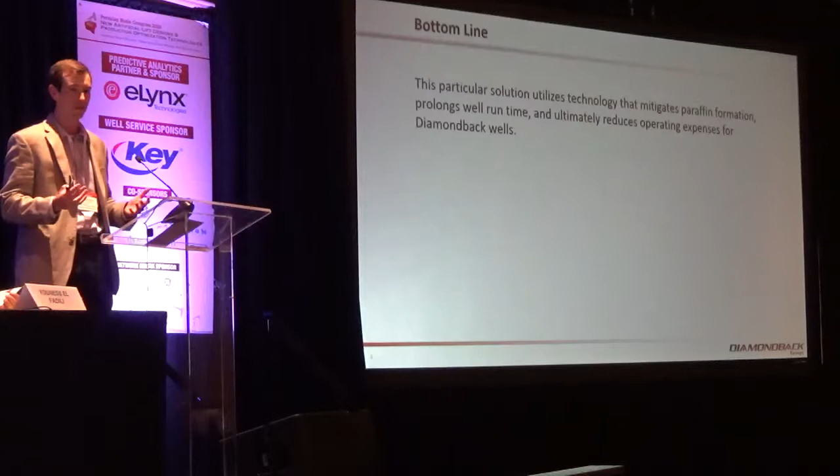So to help keep the attention, I'm going to attack the bottom line first. We were able to find a solution that mitigates paraffin formation, extends run life between wells, reduces failure time, and ultimately reduces operating expenses for Diamondback wells.

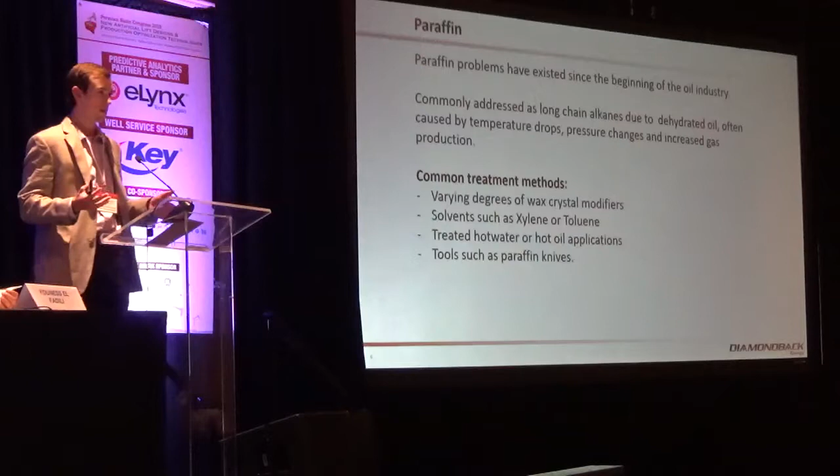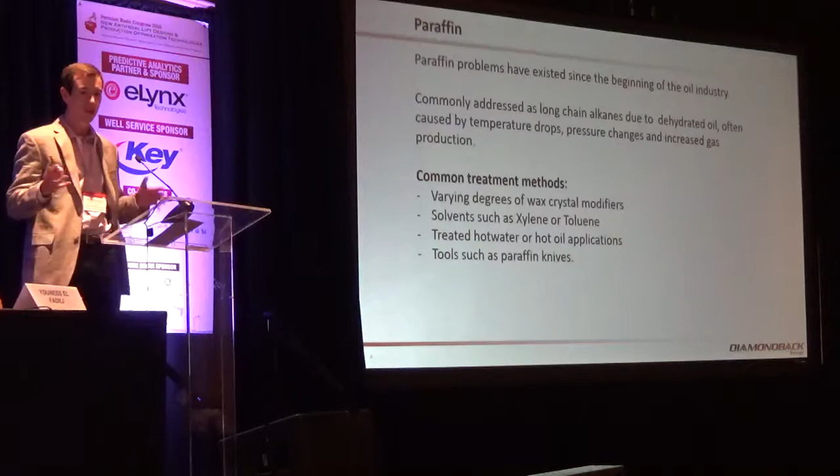So diving into paraffin, if you don't have to deal with paraffin in your oil wells, you're blessed. For the rest of us, paraffin has been around since the beginning of the oil industry. Back in the first oil well in the 1800s, they were dealing with this stuff. It's commonly addressed as long chain alkanes due to dehydrated oil. It's often caused by temperature drops, pressure differentials, increased gas production.

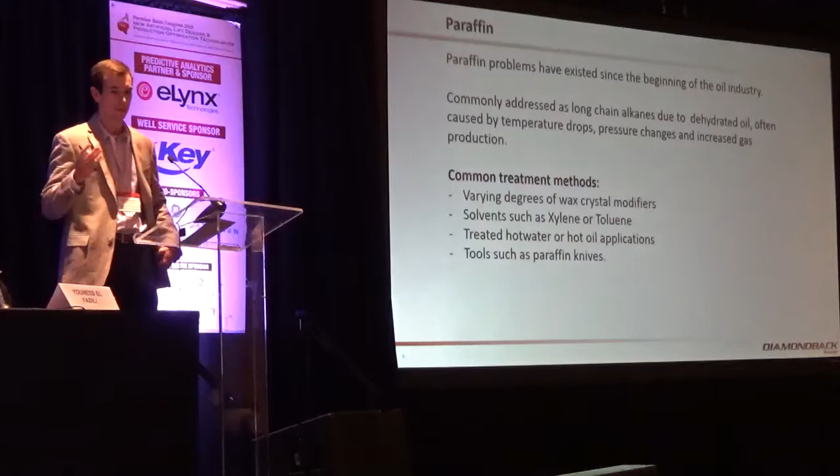Common treatment methods in the Permian, everybody uses wax crystal modifiers at some concentration. We heard yesterday some of these companies are using various degrees of xylene and toluene, whether that's treatments on a frequent basis or in workovers, hot oil applications, hot water, and then when you get a workover rig there, paraffin knives at times, at severe times.

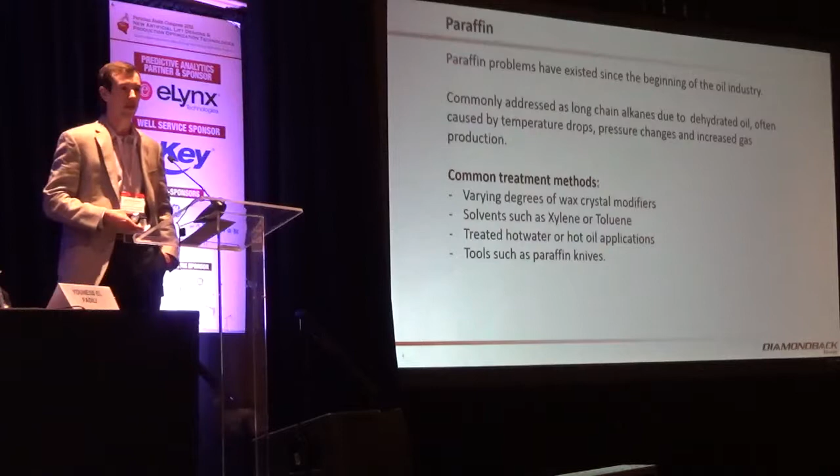The field that was in focus for Diamondback is called the Bloxham Prospect. It's a field that's about 45 minutes south of Midland. It's considered the South Midland Basin.

This field is kind of the worst among paraffin issues for Diamondback's portfolio. This area was initially part of the multi-stacked vertical play called the Wolfberry about 10 years or so ago. Then as horizontal technology swept through, we started drilling Wolfcamp shale wells and Sprayberry shale wells also. So we've got a mixture of both vertical wells and horizontal wells.

At this point in the life cycle, all the wells are in their exponential decline. A lot of the wells were initially drilled in the 2009, 2010 era.

For this particular field, any well work we do is always met by dealing with paraffin. The cloud points range from surface, sometimes we see paraffin on the surface pipe, all the way down to about 3,000, give or take. When we have a rig doing work, we are on average 1 to 2 days just focusing on paraffin before we get to the actual failure, whether it's the rod part, hole in tubing, or what have you. Worst case scenarios were 5 to 7 days - hot watering, rod stripping, you name it - trying to take care of the paraffin to clear everything out.

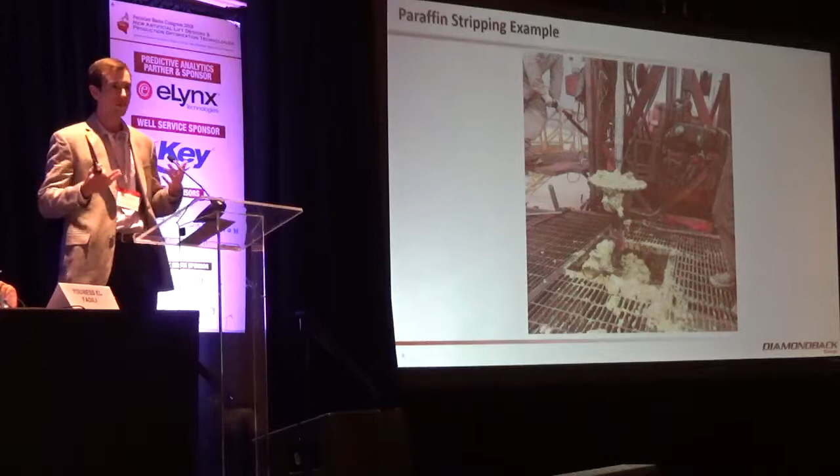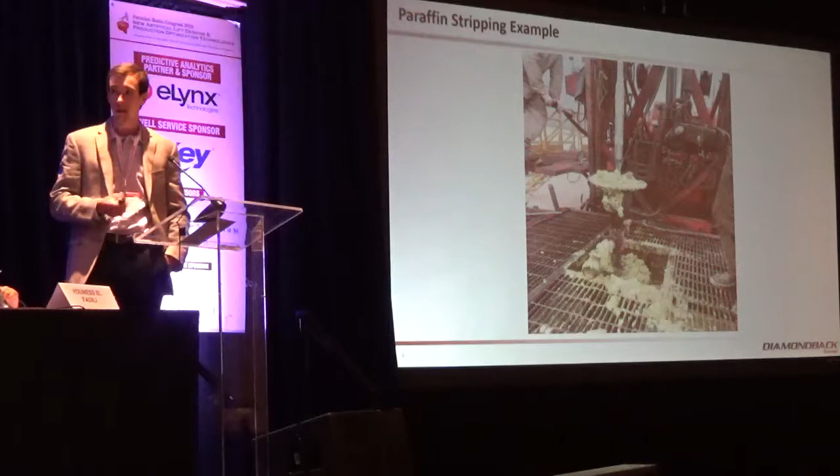So I learn best with pictures, and that's what I have a lot of in my presentation today. Here's a common photo that we see stripping out of the tubing there. We've got dehydrated paraffin just falling off the rod string there.

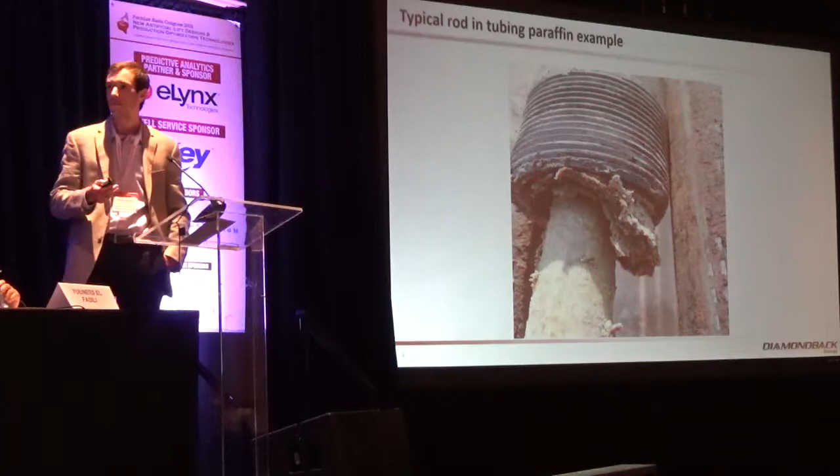Another example of stripping rods out. Beautiful. This is my favorite. Just like the issue I described before, where we're unsetting the TAC and coming out tubing joint by tubing joint, there's a rod in there somewhere.

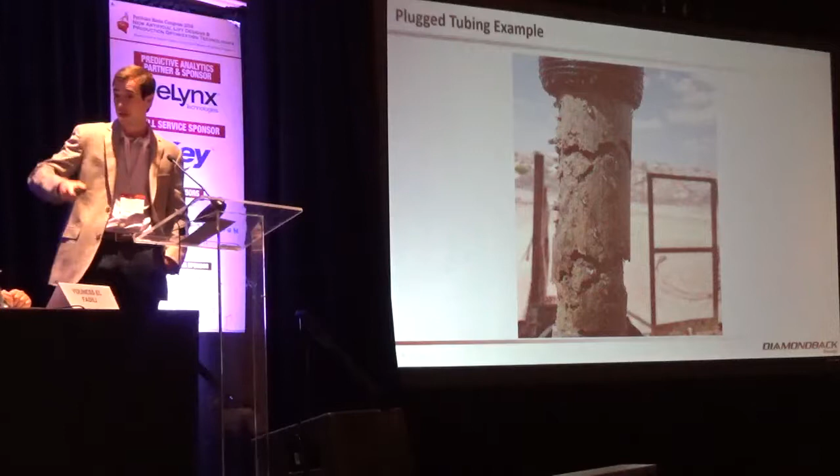We've got the pin end of the tubing above, and then we've got the box end of the next joint. This is on the rig floor, and the paraffin's just occupying every void space in that tubing. The interesting thing about all these wells is these are all batch treated wells, so there's wax crystal modifier pumping down the backside at some frequency. It's obviously not doing its job.

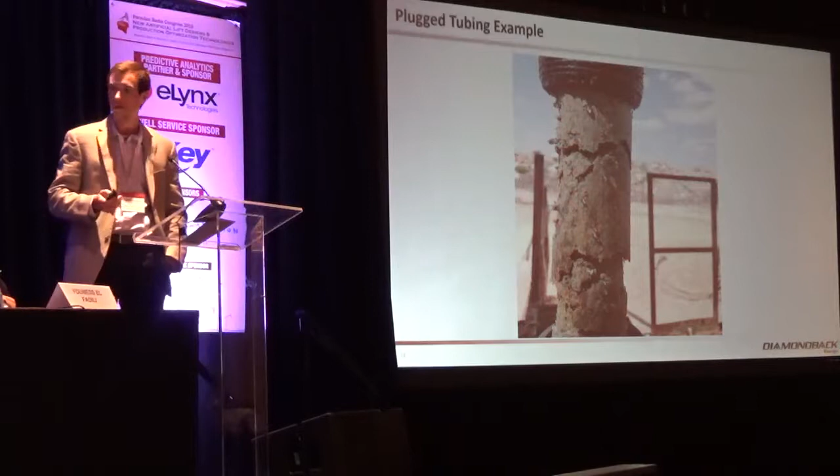So initiating what would become our version 1.0 test, we set up parameters for this first part of the study. As a team, we went out and issued opportunities for 3 other unconventional style companies, along with the existing chemical company we had. We had guys offering the nanoparticle blend. We had some guys offering this aromatic, aliphatic type chemical. So we had 4 companies in total.

Just a couple of points about the first test. It was to be a 3-month test period with a well pull at the end, just to verify what we had through physical examination.

What was special about this too is that we went to the chemical companies and said, hey, you guys tell us what to pump, you tell us the frequency, the methodology for treatment, and we're going to yield to you for the success of your particular well.

We also utilized - we had our pumpers checking back pressure valves, check valves, getting a surface analysis of paraffin on the top. And we also utilized flow line recording devices, checking the trends for flow rate and pressure changes throughout the time frame.

And so after the 3-month period, we went to move a rig over there and started pulling rods. We pulled all the wells unannounced, just to keep everybody on the same playing field. Sometimes you got to do that.

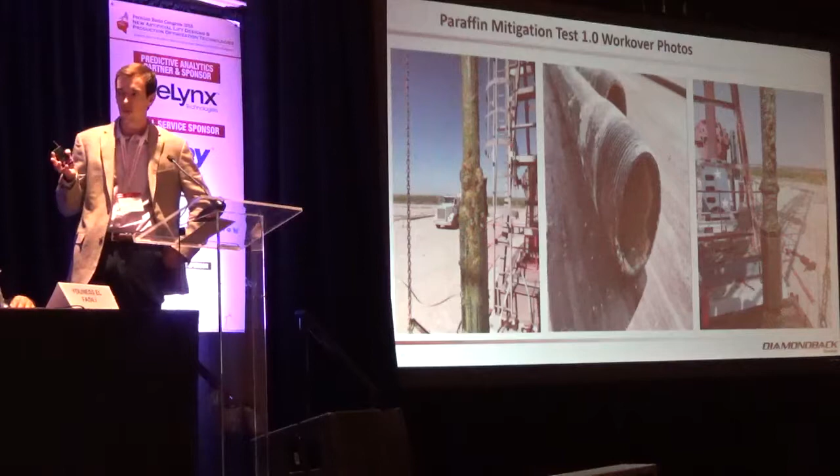Here's some photos just kind of showing the results of that particular test, going from left to right. You've got one example of hydrated paraffin - that's a rod there, kind of in the derrick, or in the slips there. You can distinguish the clumpiness there. In another photo, I've got the tubing with the sheath of paraffin on the ID of the tubing, and then on the photo to the right, a similar circumstance.

So here I was, 3 months into this test, no real good results. My boss is asking me, 'Hey, what do you have?' And I don't really have anything, so I'm thinking to myself, well, do I need to make something up, or where do I go from here?

What's interesting about Diamondback is that we have the technical teams rotate through each team, sitting in on meetings to get a better idea of the bigger picture. So we had a geologist sitting in our production ops meetings for a month previous, and he was hearing time and time again about this mysterious stuff with paraffin hanging up our wells all the time.

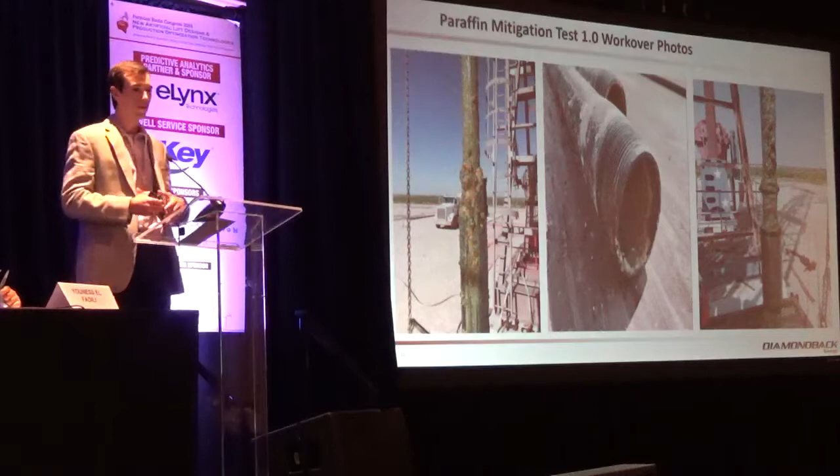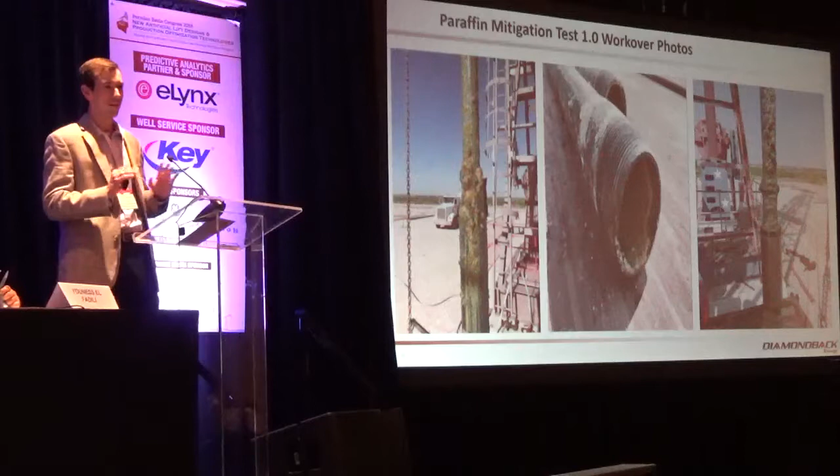He found himself at a conference, he would later tell me, where he ran into the company Revelin, and they were advertising a tool that's supposed to mitigate paraffin formation. So he told me about the encounter and said, 'Look, I'm a geologist, you're an engineer, but I heard about this, and maybe you want to try it out with your issues.'

And so we connected with those guys and brought them into the office for a conversation. So to describe a bit of a summary of the tool, Amber's going to go into detail about this, but what they offer is a tubing sub.

They have rod variants too, but it's made out of this aluminum alloy, and how it acts is kind of like a pressure transducer. There's several examples here, but you've got pressure coming in out of the wellbore, and that transducer translates that to an electrical signal.

Another way to think about it is a tuning fork for your piano. You kind of bop it on your knee, and the force that comes into that fork is translated to a certain pitch, a wavelength, and that's what you tune your piano to.

Well, the tool works in a similar fashion to where reservoir fluid is coming into your wellbore, and as it passes through that tool, it gets a boost of amplitude such that the molecular structure is prevented from attaching to each other. So you don't make the paraffin solids disappear, you just keep them in solution as they flow up through the tubing. This is a one-way reaction - it doesn't fall apart, or attach to each other, as temperature decreases all the way up through the wellbore.

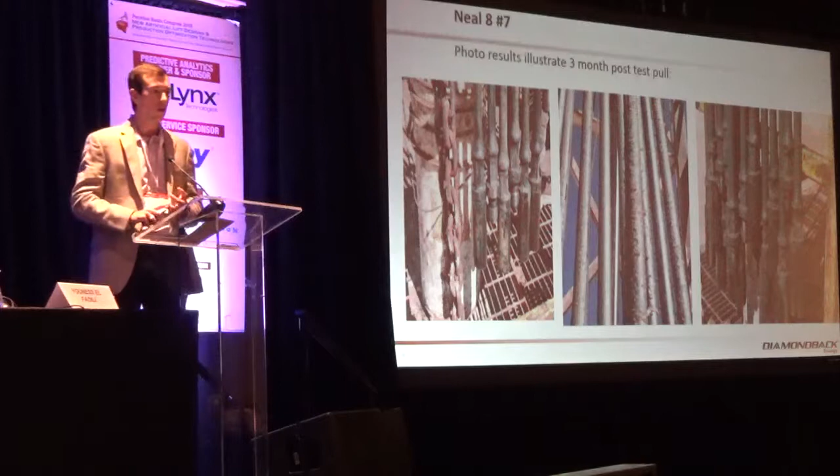Going to the next well, the Neal 8 number 7, kind of the same thing. I've got the rods we're looking at, the upsets on the left side, the bodies in the middle. I asked the guys to take photos of anything they see with solids, and this is the best they could come up with. Again, we didn't use any rod strippers, no hot watering, none of the conventional methods we'd normally use before getting on the well.

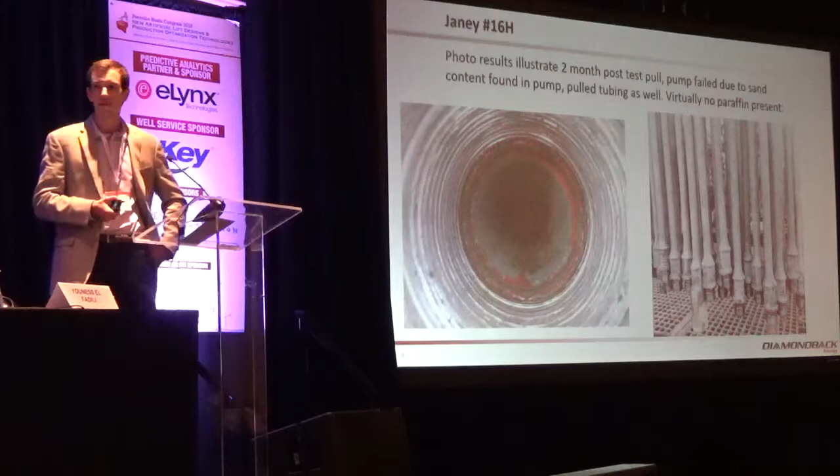The Janey 16H, this is Diamondback's first operated horizontal well, so there's a bit of sentimental value with this one. Looking at the rods on the right side, nothing's there. I asked the consultant for a photo of the tubing, and I got exactly what I asked for. I should have asked him to get a photo of the tubing on the racks, but there you go.

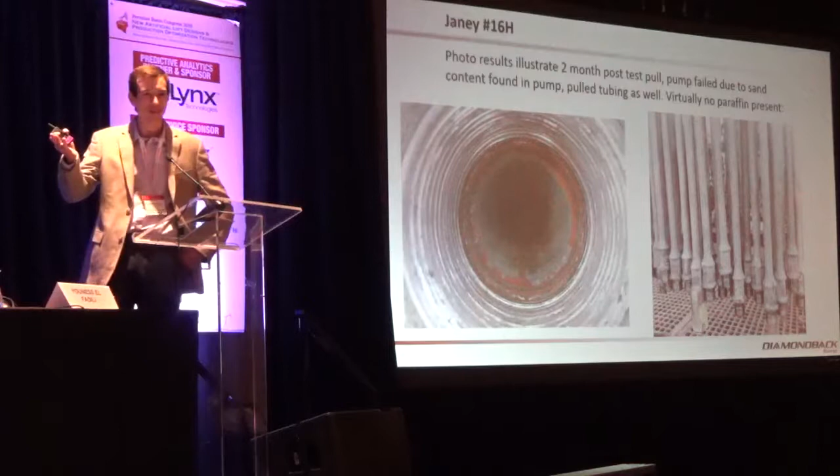That is the tubing in the slips, looking down hole. So that's exactly what I asked for. As far as you can see, though, there's no paraffin in that one.

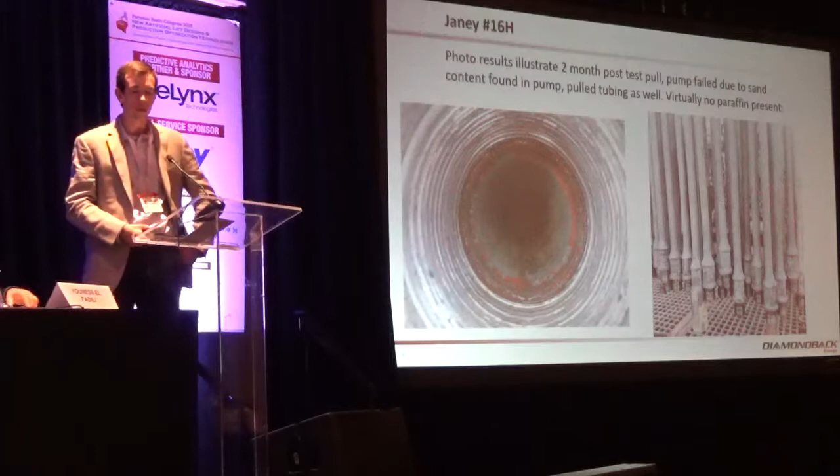The interesting thing about this one is that this well actually failed 2 months into the test. We initially thought, well, maybe it's a solids issue. As we pulled it out, to our surprise, there's absolutely no solids on those rods. We ended up pulling the tubing on this one too, and couldn't find a trace of anything. The pump was sand cut, and we had some sand in the mud anchor.

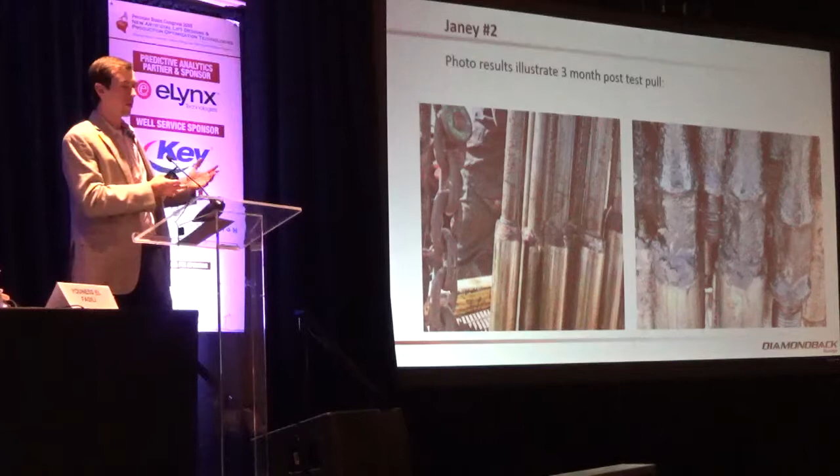Going on to the Janey 2, as we moved along the 7 wells, typically we'd have a deal where it would involve 1 to 2 days just dealing with paraffin to get the rods or tubing out of the hole. In these instances, we were rigging up on the wells, pulling the rods, taking a look, and running everything back in about 8 hours. Our workover crews worked 10, 12-hour days. We were rigging down and then rigging up on the next well the same day. We were moving pretty quickly.

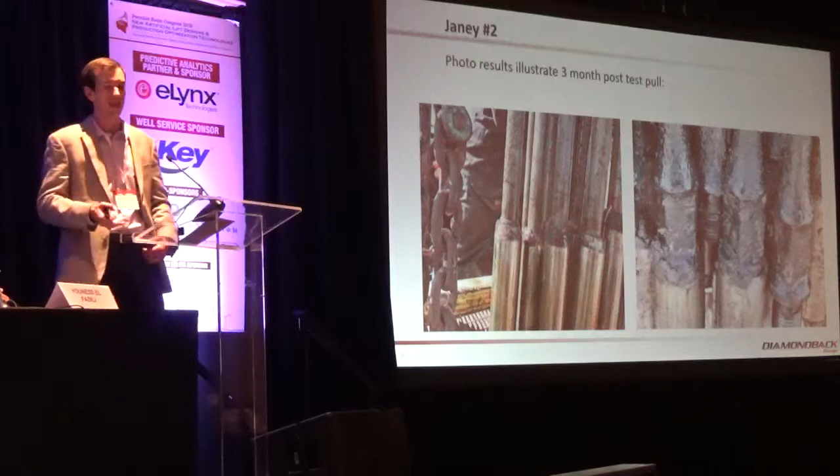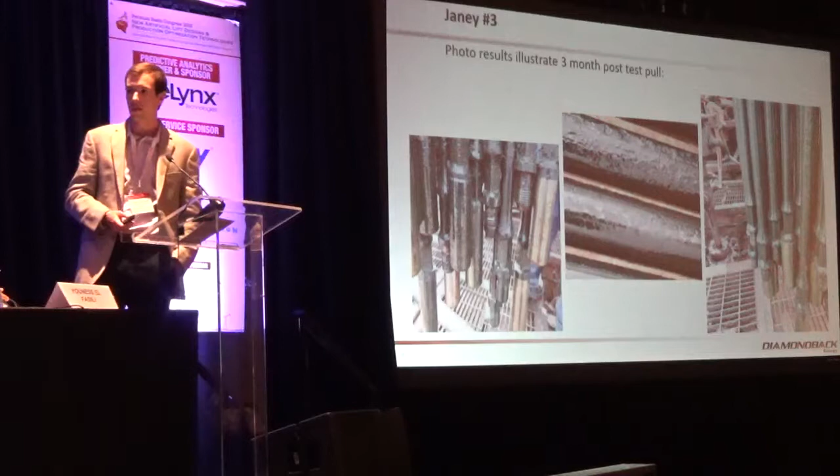The couplings and upsets have some hydrated oil there, but no paraffin to speak of. The Janey number 3 - this gets old after a while, but no solids to speak of. There's some hydrated oil, but none of the solids that would have existed normally.

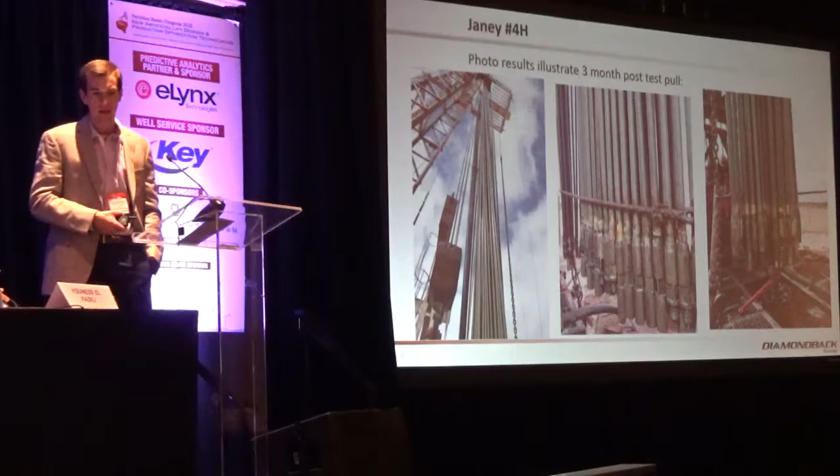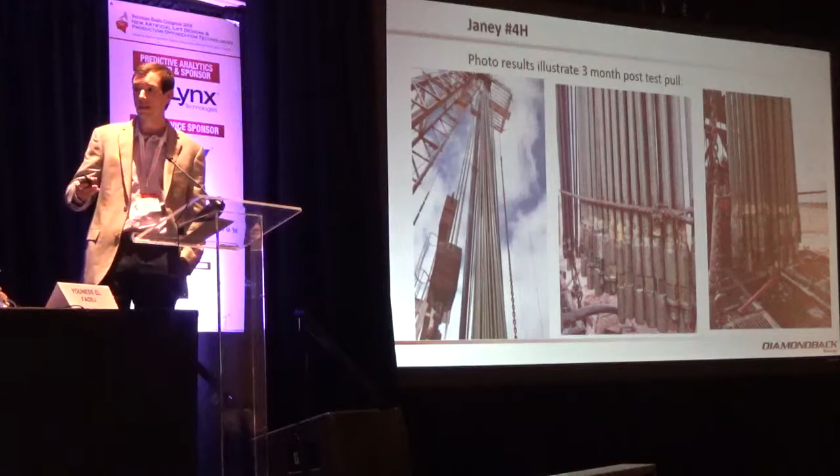The Janey 4H, this is a well I had the pleasure of going out on myself. These are photos from my iPhone. I got all the rods in the derrick there, and I tried to zoom in on any solids I could find. It's pretty difficult there because there aren't any. This is the photo my boss took the liberty of stealing from me at his slideshow yesterday, and that's okay - he's the boss, I guess.

So the Crystal number 1 is kind of the best story that we have. This well, we had actually intended to put the tubing tool on another well. We had 2 rigs in the area at this time.

That well wasn't as bad as this well. This well is one of the wells that we were treating paraffin for a week before we could get to. I think we had a pump issue. So this was the well we ran the gamut on.

We hot oiled, hot water, pulled a lot over the string weight. We had to replace the fiberglass rod taper. We had fiberglass shrapnel in the tubing.

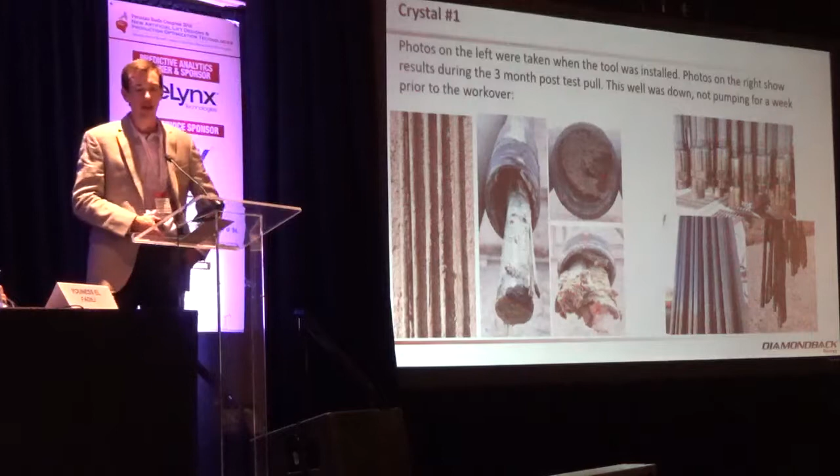We actually put everything back in the ground, put the pump and rods back in the ground, and found that we had a surface electrical drive box issue for this well.

So now the important question you're all probably thinking is, well, what does this great thing cost? If you really want to know the answer, you can ask that gentleman right down there in the front. I'm not going to tell you what we pay for it, but I will tell you our cost trends.

Flat time associated with rig costs, rental rates, stuff like that, hot watering, time designated dealing with paraffin before we get to the failure. The third factor is equipment replaced due to dealing with paraffin. Like that example before, hacksawing fiberglass rods out, we had to replace that taper.

So I averaged that over all the wells, well by well, averaged that over the total wells in the field, and then annualized it. This is what we have: one method versus the other, we pay out in about 1.5 years. At about 3 years, we're 2 times the expenses ahead. At year 5, we've saved about a factor of about 3 times what we normally would have spent. This is just on a well by well basis.

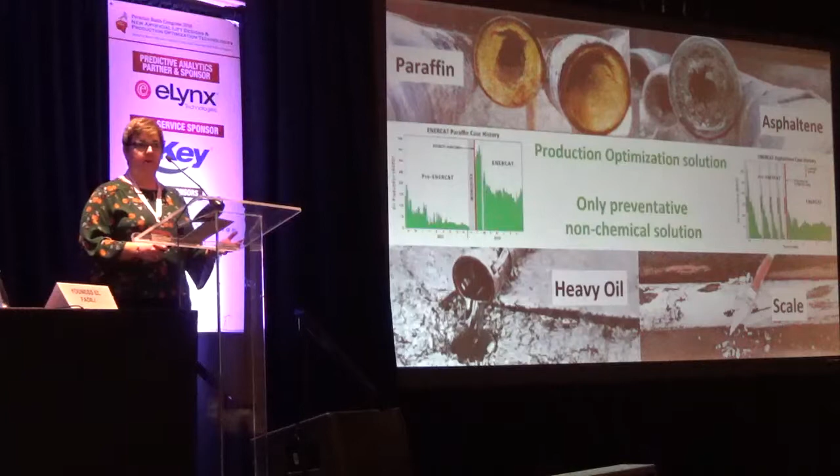Our goal is really to optimize production in the industry, and do so in a way that reduces the amount of chemical that has to go down. I'll also note that this is a preventative solution as well.

So if you're talking about drilling new wells and going in and putting in a completion, you may want to consider actually having a tool in there so that you don't have to go through these problems just to fix them.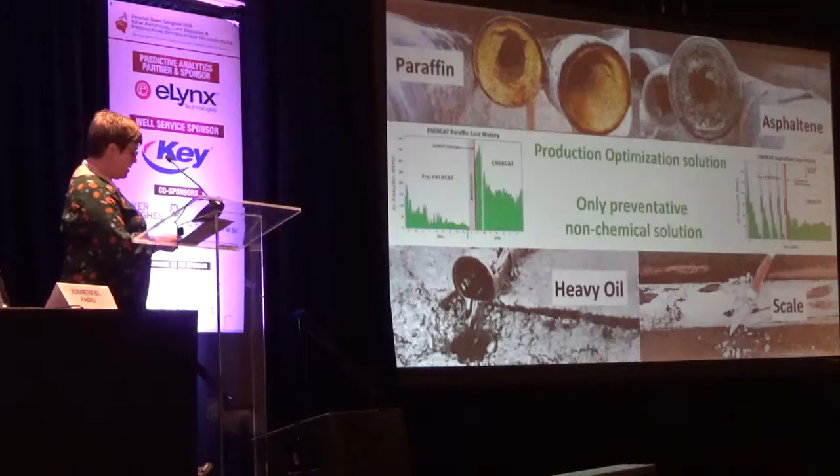In general, the operating principle is really to stabilize molecular dispersions. Everything we do, whether it's preventing asphaltene flocculation or even reducing emulsions, is really about promoting molecular solubility and preventing paraffin crystallization and scale deposition.

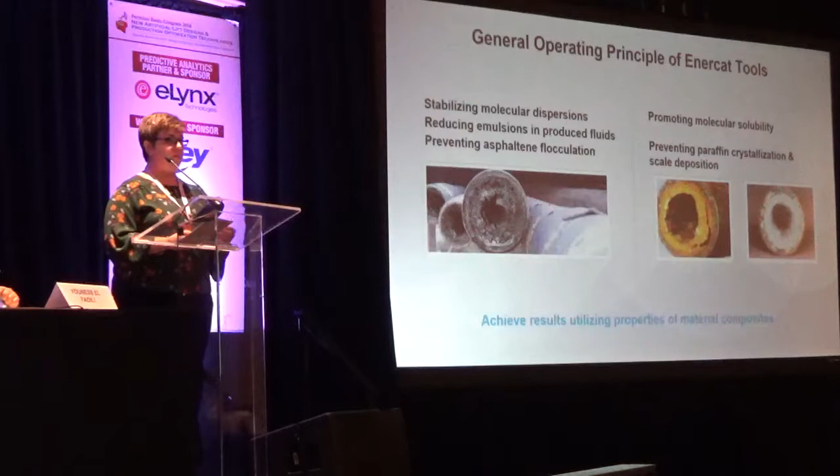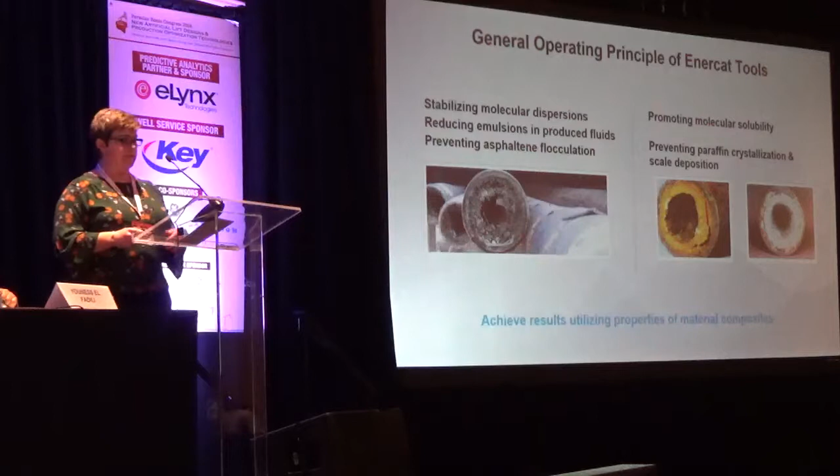The way this works is that we use material composites. Matt mentioned the idea of a tuning fork, and what the tuning fork really shows you is how classical waves move through materials, no matter what the material is. It does so by taking advantage of the lattice dynamics associated with that material. Every material has its own lattice dynamics and its own vibrational characteristics, and those are the things we're going to take advantage of.

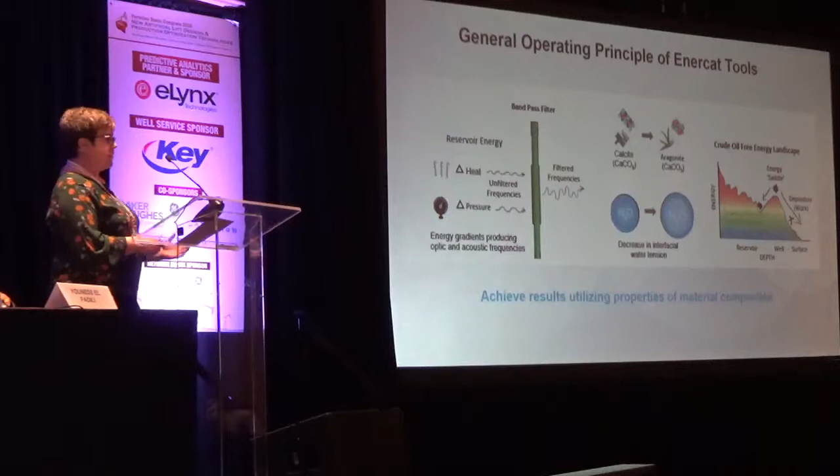So in this case, I think about it also as a bandpass filter. If you think about electronics, the tool here, the material on it, is really acting as this bandpass filter.

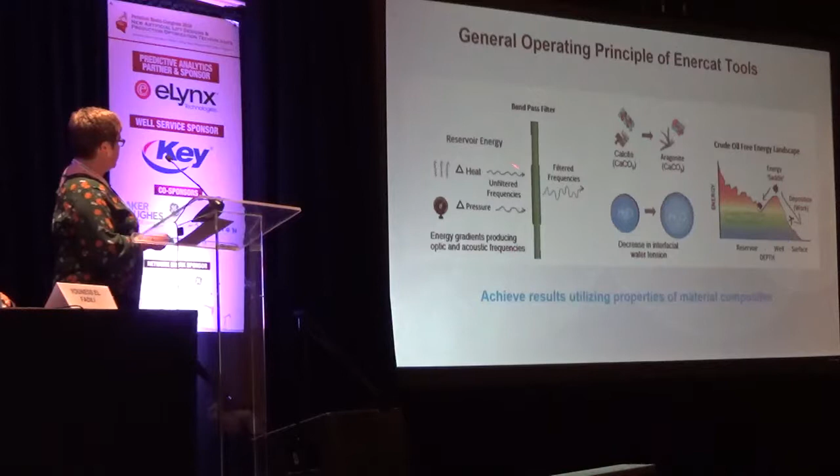So if we have a source, and in the subsurface what we're looking at really is what I'd consider a black body source, you have a continuous range of frequencies available to you. Depending on what those frequencies are, and if they're in resonance with the lattice dynamics of the material, they're going to make it through that tool. The ones that aren't in resonance with the lattice dynamics are going to basically be dampened out.

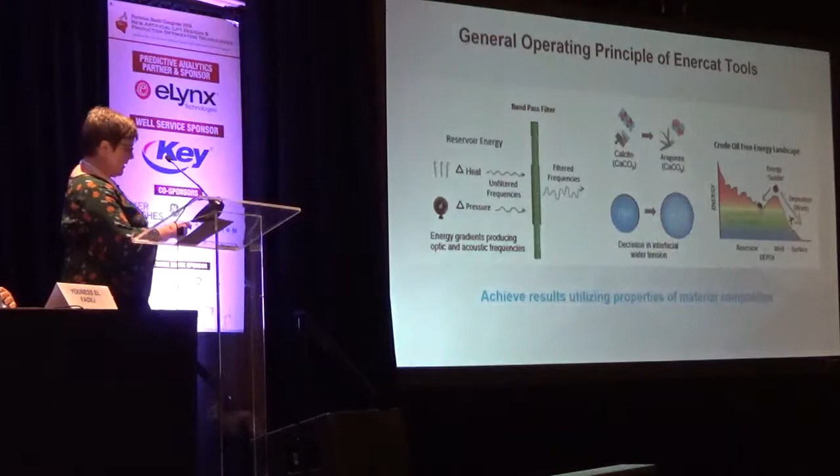And when we do that, that allows for these specific frequencies to really drive the amplitude of low frequency vibrational motions in molecules. When we do that, we'll skip over here to this cartoon of a potential energy surface.

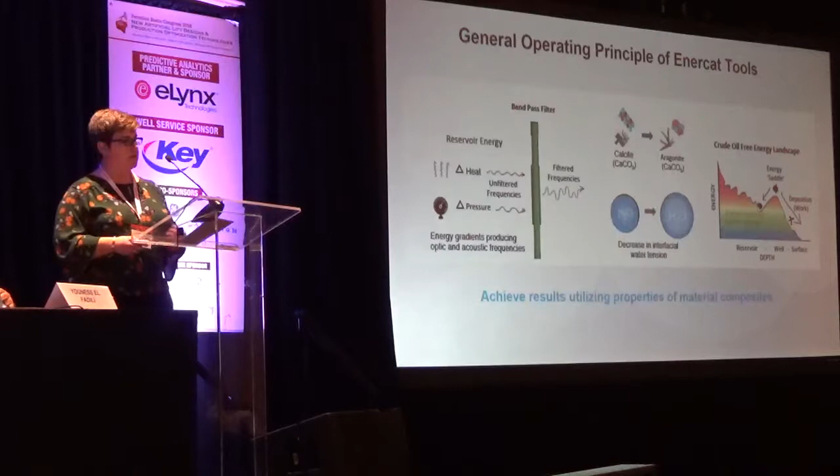What happens is that when we're down in the reservoir and bringing up molecules, you all know it's not until you have a dramatic change in pressure or temperature that you actually see things like scale deposition or paraffin deposition. And that's because at subsurface temperatures and pressures, all of these molecules are really in an amorphous state.

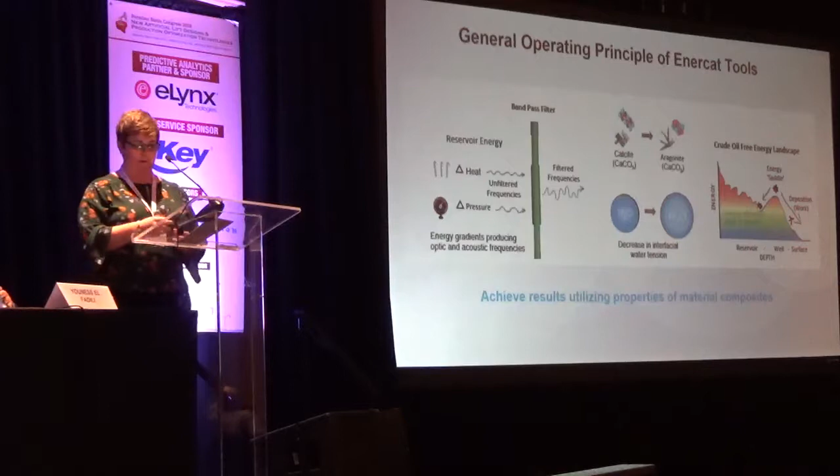What that means in terms of where it sits on the potential energy surface is that it sits up here in basically a saddle point, ripe for being tipped one direction or another. What we're interested in doing is tipping it into basically a local minima that actually has physical properties and physical characteristics that are more useful.

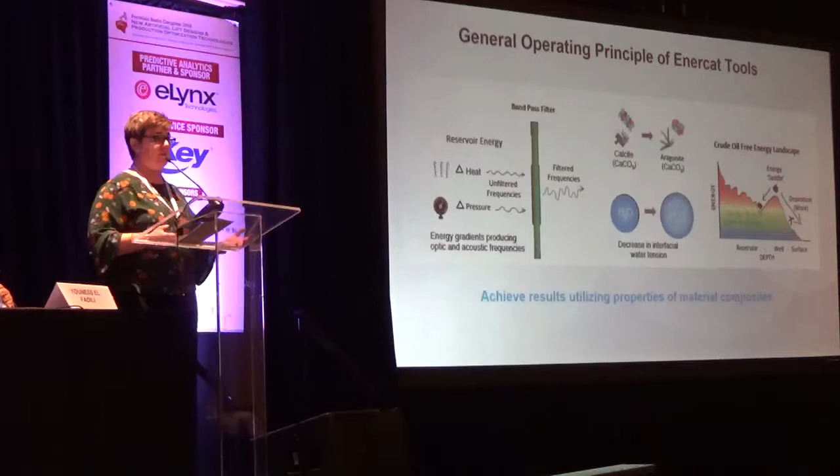So for instance, in the paraffin situation, what we're doing is driving the paraffin colloids basically into a different local minimum such that they no longer have attractive forces anymore, and so they're not depositing out.

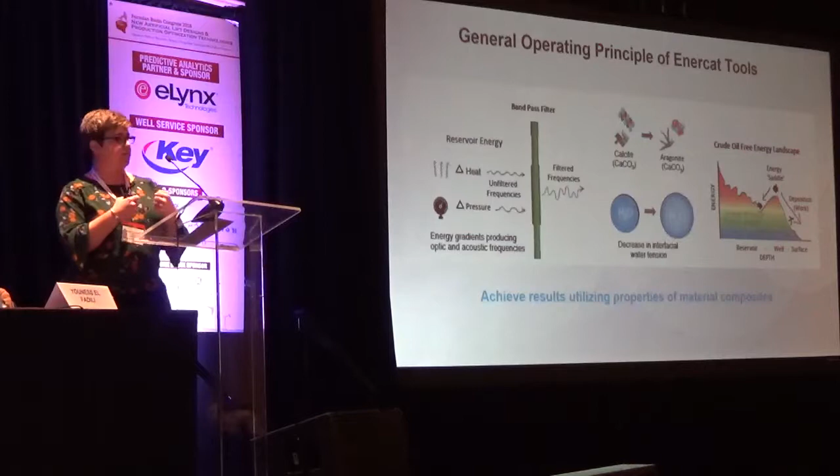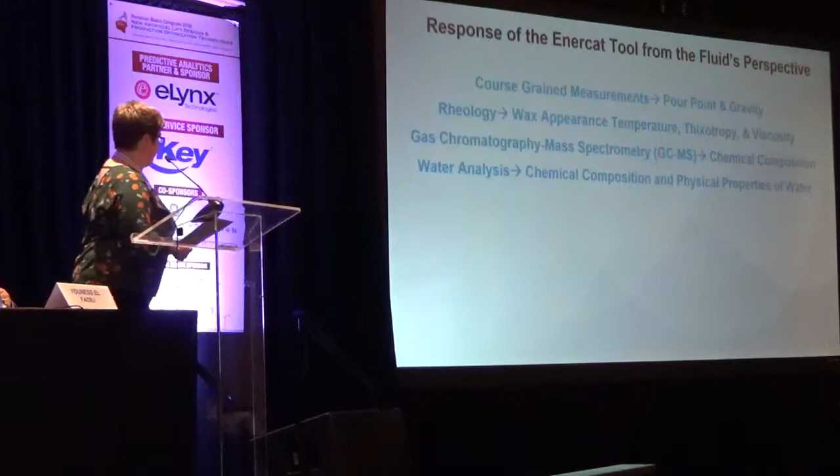All right, so we have some instruments in the lab that allow us to actually characterize what's going on with the fluids. I wanted to show you some of the work we've done with the Diamondback fluids, and really think about this from the fluids perspective, or the response to the Enercat tool from the fluids perspective.

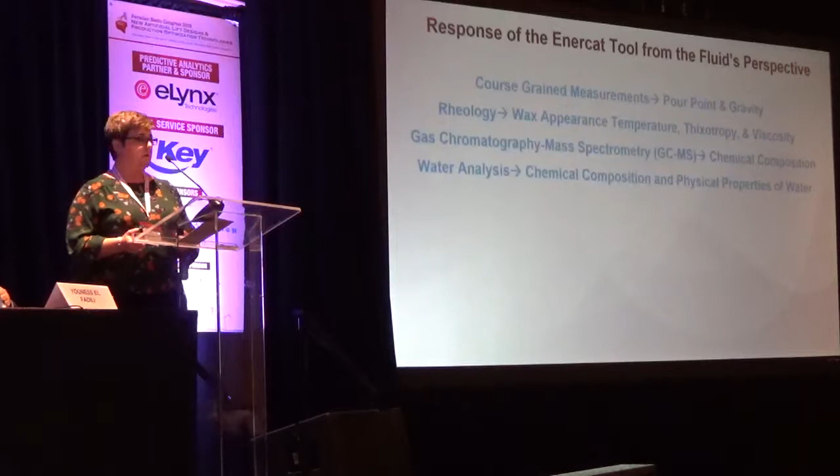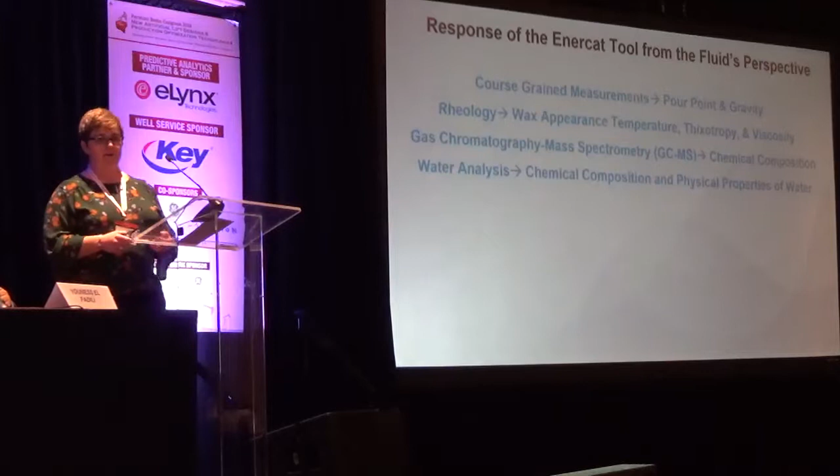We do coarse grain measurements that you see a lot, so pour point or gravity measurements, for example. We also have a rheometer, so we do wax appearance temperature, thixotropy measurements, and other viscosity measurements. We take a look at chemical composition using gas chromatography coupled with mass spectrometry, and then we also do water analysis, looking at the chemical composition and physical properties of the water.

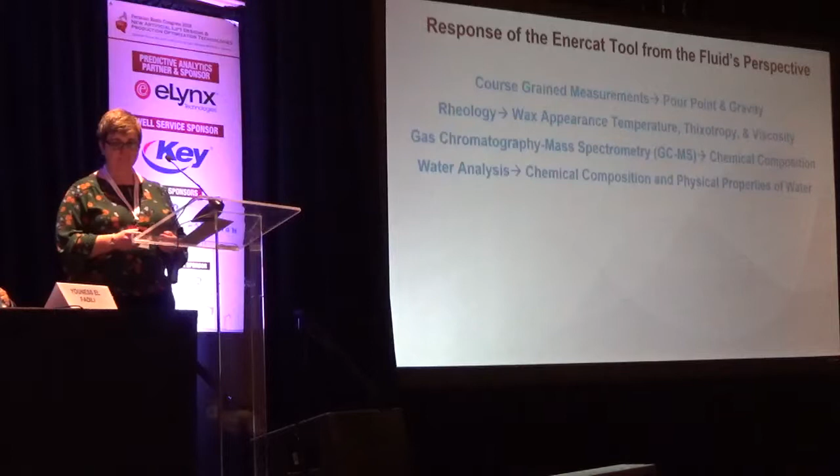So for example, I'm just going to show you the results from the Diamondback Neil 8 number 7. I'm picking one and then I'll show you a summary of results. In this case, we see a bit of a decrease in the pour point, slight increase in the API gravity.

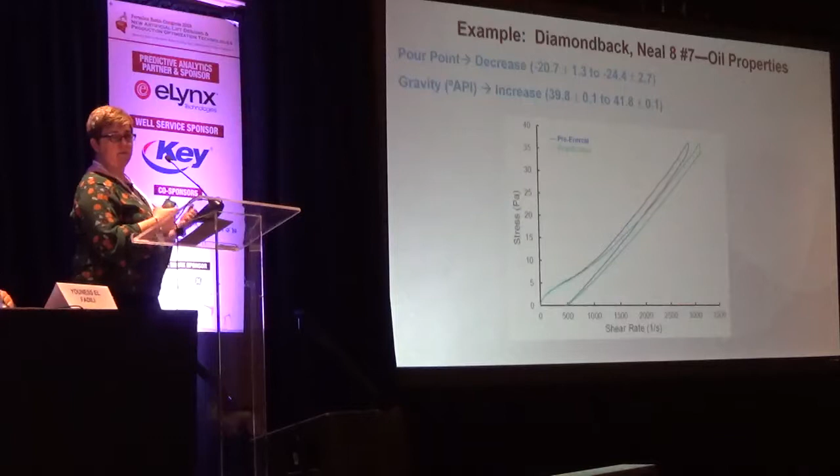This graph is of the thixotropy measurements that we do, and what we're looking at is how the structure builds up in that fluid. This is a rheology experiment, and as structure builds, this curve will get steeper. In blue is the pre-Enercat sample, in green is the post-Enercat sample. There's a slight change in how the fluid structures, which makes sense if we're changing how the paraffin colloids are interacting with each other. We also take a look at the area between these curves.

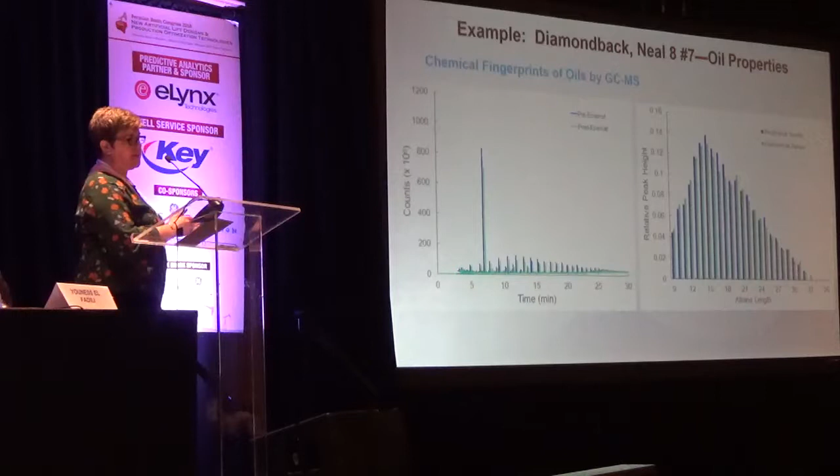In terms of water composition, we're looking here to figure out what kinds of ions, both cations and anions, we're maintaining in solution. A lot of wells have both paraffin problems as well as scale problems, so we want to take a look at that.

We're monitoring all these things because what's important about cations and anions is that they really change your interfacial tension pretty dramatically depending on what you have in solution versus what you don't. So for instance, in situations where we're talking about emulsions and breaking those emulsions, we do think it has to do with things like the cation and anion concentrations that are present.

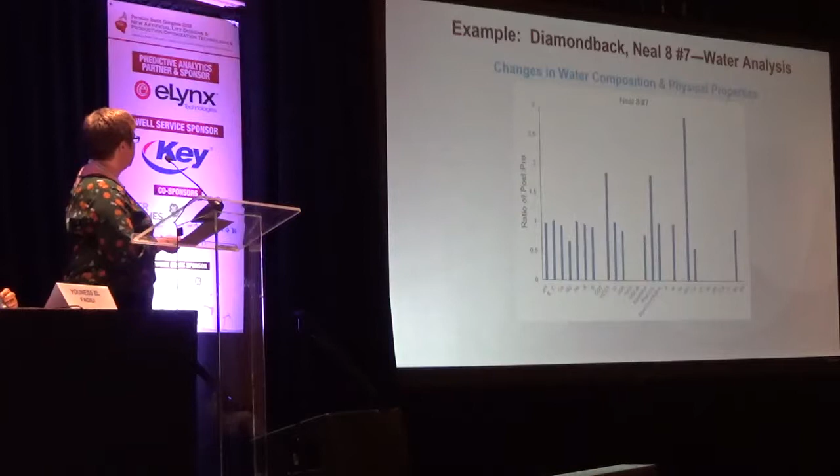We haven't found the silver bullet in terms of the one measurement that will tell you what the effectiveness of the tool is, but we're working on that. So we're also looking at things like dynamic light scattering to look at particle-to-particle interactions.

With that, I just want to point out that really the goal of Relevant and these tools is to restore profitability to communities, rebuild communities, and basically renew hope with these types of technologies. So with that, I'm happy to take any questions, and I appreciate the time that you've given us today. Thanks, Dr. Edwards.

Question over here. Harris with Chevron Energy Technology Company. Good presentation. You know, one of the things when you work for R&D, you get a lot of questions.